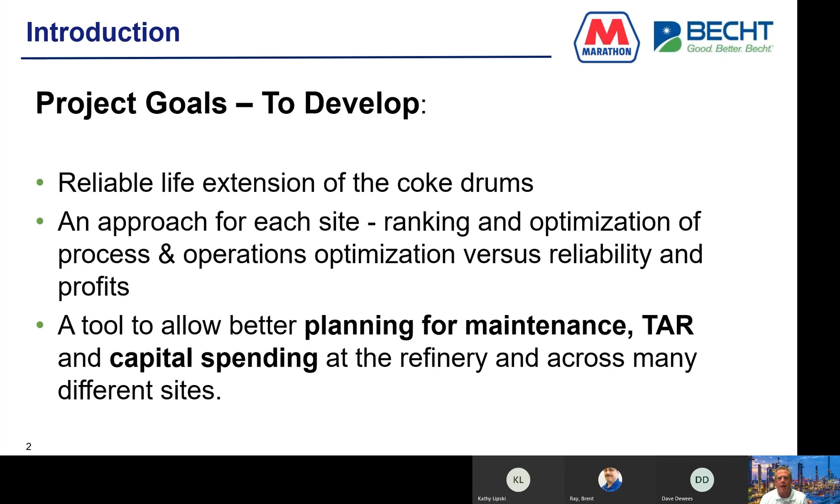And that's really the foundation for what we're going to talk about today, is how do you get out in front of this and come up with a thoughtful process to assess and improve reliability, and then finally to come up with a plan for better maintenance and turnaround planning. And that's really what led to this project starting in the first place.

It really was based on a conversation with Mike Nichols and some of his team with Becht's team at the API Inspection Summit in Galveston in 2019. How can you do this? How can you get out in front of it? Marathon went from having 4 sites with cokers to having 7 sites with cokers. So how do you manage all of that information and all of that data, and how do you help people learn from each other?

So that's really what gave the impetus for this project that we're going to talk about today. How do you bring together inspection, maintenance, operations, process, and really get people working together? And then from that is to develop, Mike wanted a report that people could look at, that they could plan for where their coker is, where their drums are, in their cycle time, where they are in their life, where they are in their inspection needs, their repair needs, and then most importantly, and really from a capital standpoint, is planning for replacement, because a replacement of cokers, drums, as you know, can be very expensive, anywhere from 50, 60 million to a grassroots coker, 200 million.

So you don't want 7 refineries coming to you at one point asking for money. So how do you do that? How do you come up with a strategy to work together as a team on site? That's really the critical thing. That's the takeaway I want you to get from today, is how do people work better together to manage the asset, in this case, the coke drums.

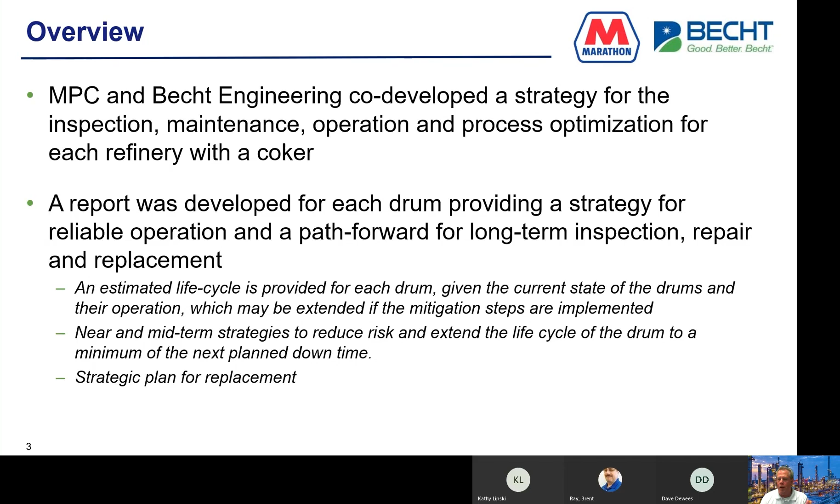We all know, we work on cokers, we've seen hundreds of cracks, we've seen through-wall cracks, we've seen bulges, we've seen squats in the skirts, we've seen leaning coke drums, we've seen drums where the skirt-to-shell attachment weld has actually come unzipped and drums actually sliding inside of the skirt. Those are things that you don't want to have happen. But really with cokers, as we all know, you got to get out in front of that, because if you don't, this is what happens.

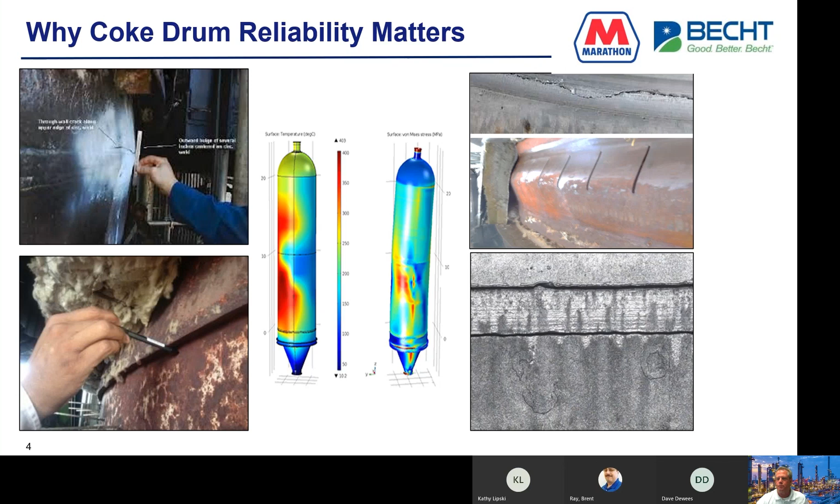At least that's been my experience, that not everybody works together. So that's one of the things we wanted to fix right off the bat. So we developed gap analysis for both inspection and process, and then mechanical.

So it's the process and operations folks. We have two SMEs here at Becht. Mike Kimbrell, shout out to Mike, former retired VP, he's a Becht advisor. And Mitch Maloney, formerly with ExxonMobil, both Coker SMEs, world renowned. And they help lead our gap analysis with the sites to look at how they're doing things, get them talking about maybe creating some best practices.

So we did that work, and then combined that work with the inspection and mechanical folks, same gap analysis, different questions, and then we got both of those groups talking to each other. That's really critical. That's one of the things that I think makes this program very powerful.

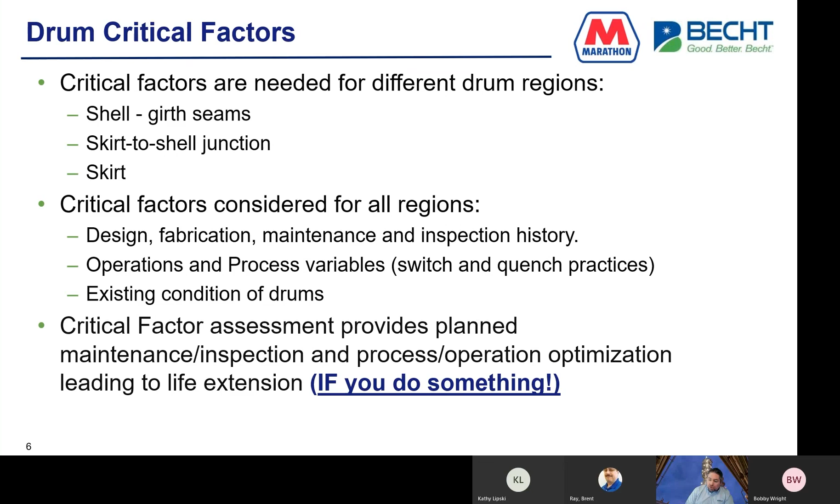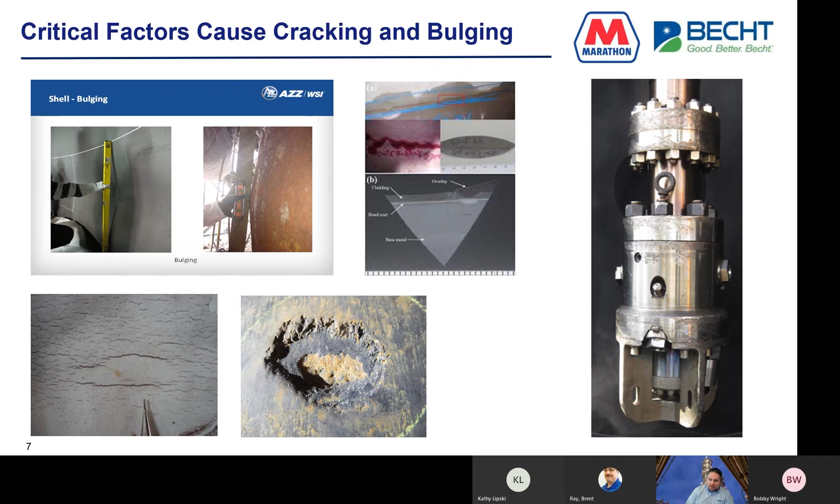Some pictures I'm sure we're all familiar with, all kinds of drum damage we're thinking about, from elephant skin cracking there in the bottom left, to some pretty severe bulging courtesy of AZZ — thank you — to the girth seam heat affected zone cracking we're used to finding as well, and even more exotic things. What you're seeing at the bottom towards the middle of the slide is actually some pretty severe drill stem damage from the coke cutting process. So just some illustrations that this is a violent, chaotic process with lots of opportunities for damage.

So possibly the most important thing is understanding the present condition of the drum so that we can project forward. So that's really our baseline. And it's really the foundation of not only this assessment, but future fitness for service assessments too. It's a comprehensive baseline that allows us to do all of that.

And just going into a little more detail for those critical factor designations we talked about a few slides ago. Design, the kinds of things we're looking for are fatigue resistant design, or how you measure up relative to fatigue resistant design, whether you have a constant thickness wall, matching welds, strength matching, drum metallurgy, certainly center feed is an important consideration. So all of those we look at.

Fabrication is maybe not as highlighted as it should be, but it's incredibly important, and we did unfortunately see the effects of some substandard fabrication as part of this project. But accurate attention to detail. Is there a blend radius where there's supposed to be a blend radius? Is the crotch radius the proper crotch radius, and does it blend smoothly into the surrounding material? Are the welds ground flush? Was post-weld heat treat performed and performed appropriately?

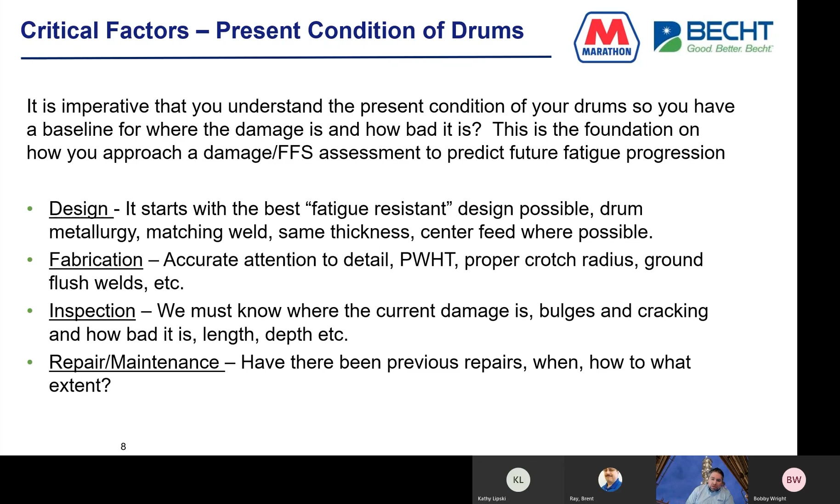And then inspection and repair maintenance are also really important. We want to know where the current damage is, and we want to be able to characterize it. We want to know how severe that bulge is, and if that bulge is near a girth seam, so that it's going to interact with it. We want to know what kind of cracks there's been, if they've been superficial, if they've been allowed to grow. And we want to know where those previous repairs are, and how extensive they were, and how they were performed, because that can also have an impact on future reliability.

So process and operations is an absolutely critical input. We have an extensive survey that our Becht process SMEs worked with Marathon process SMEs to develop, and all those folks that I gave a shout out to diligently filled out many pages of data when they had many other pressing things to do. So we thank them for that.

But it's not just about collecting data and writing it down and feeding it into the tool I'm going to tell you a little bit more about. It's also an opportunity to learn and optimize and improve daily process and operations. So this was a really important part of shared learning across the sites, and seeing how other people do things in a setting where you're also relating it to reliability and damage, which I think was really powerful.

So process SMEs from both our companies talked about steam and water flow rates, how you can get better conversion of feed if there was that opportunity, how you can minimize hotspots through operation, and improving operational consistency. So when we're talking about fatigue, consistency is an important consideration.

And we can make additional gains by measuring actual drum thermal gradients and strain and stress. So you can work with higher level parameters, which we certainly do, but the more data you provide through something like a health monitoring system or HMS, the more accurately you're going to be able to characterize what's happening to the drum metal and how that links to damage.

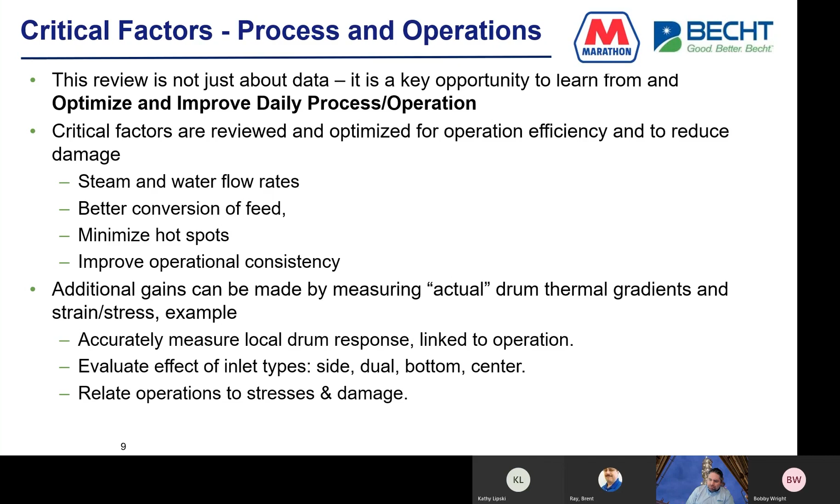So the other thing we do, and that we did as part of this project, was develop software to read in HMS data histories, automatically identify the cycles, and then create statistics on the critical factors. So we can go a little bit further than just saying, well, our target quench is 400 degrees or 500 degrees. We can actually come up with what the distribution is, because in coke drum fatigue, it often is the outliers that cause a major portion of the damage. So this is just a way we can leverage that actual data into the assessment.

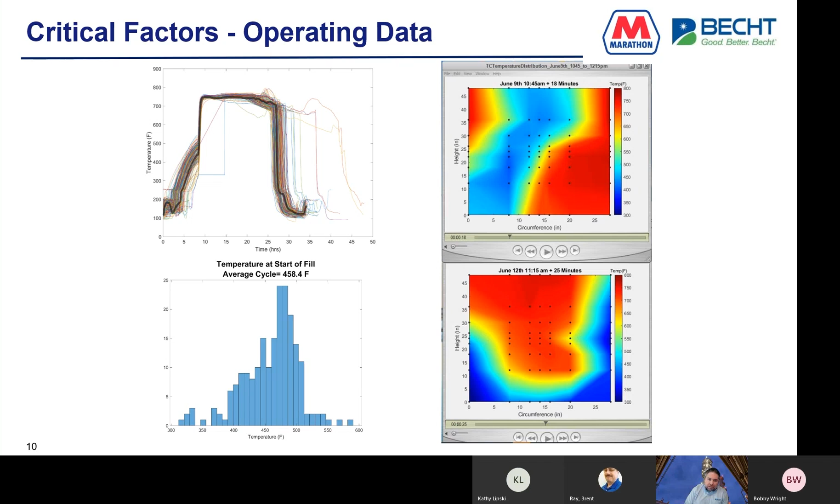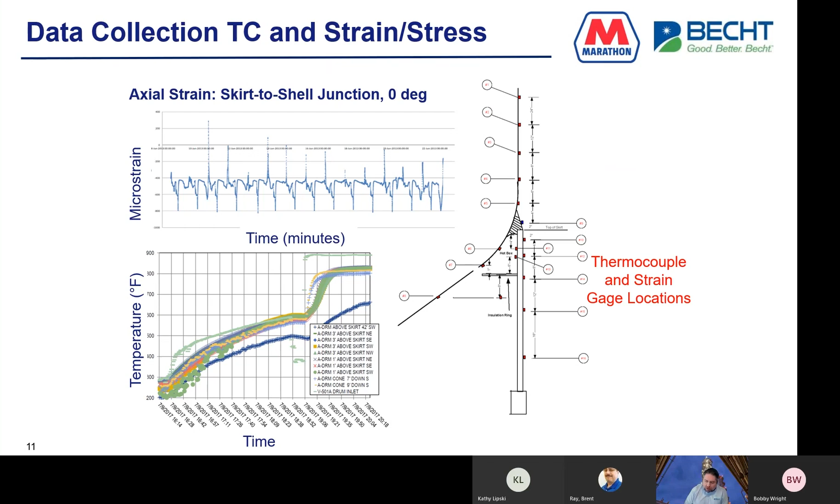And just to take that a little bit further, we can also not just work with temperature data, but we can actually look at stress and strain if we have those strain gauges applied to the coke drum. And just an example of variability here as well. On the negative side or the low side of that cycle, we actually are pretty consistent, but on the high side, you can see those peaks in strain do vary quite a bit from cycle to cycle, possibly because there are operational differences, which an HMS can help you look at, or just because the bad spots, the channeling has moved around the drum from cycle to cycle.

So perhaps the most important factor in terms of bulging and damage accumulation is probably quench, and not just quench, but the initial quench rate, which I think this slide shows really well. This is from RefComm in 2015 in Galveston from PDVSA. And this is showing you, based on HMS optimization, which underlies this, how their quench profile changed as they went through that process.

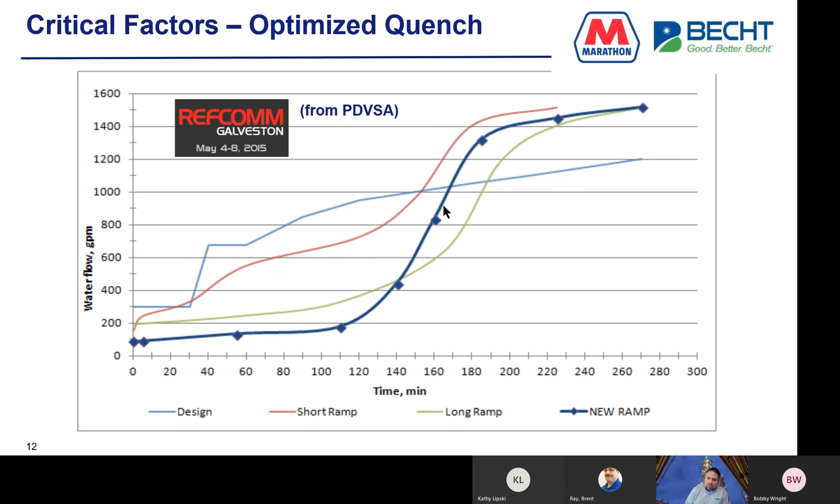So you can see they started with design, and at an hour, they were at 700 GPM. And by the time they got done optimizing, changing that flow rate until they got the strains to reduce in a meaningful way, they dropped that by 600, even more, GPM at that 1 hour mark. So, a factor of 6 difference to get the strains where they wanted. And it shows you that that initial water rate is just incredibly important, after which you can dump as much water as you want in, pretty much. But a good illustration of how you use that data to really improve operations, which is a goal when you do this.

This is sort of a graphical overview of the process we've been talking about. We start with the history, with the data, the surveys, feed that into the gap analysis. Site visit was an important part of all of these, to really talk through that data, talk through gaps in the data itself, and to make sure everyone understands it. But then the next step is to feed it into the actual life cycle analysis, which is what we're going to talk about next, and which is really, as I mentioned earlier, the basis for that level playing field across drums, across different conditions. And in the end, all of that feeds into the action plan and recommendations.

Sticking with the life cycle analysis, though, we found 3 keys to success for making this work. One, using industry data. And I just want to step back for a minute. Bobby mentioned Mike Nichols, now retired from Marathon. But this really all started with Mike saying there's got to be a way that I can have some indication of approximately where I am in the life cycle without putting 96 thermocouples and strain gauges on every single drum and doing years of analysis with finite element and data analysis and more complex simulation. I have to be able to have some indication. And so that's really what this was about, taking a relatively simple fatigue model we're going to talk briefly about and calibrating it to industry data.

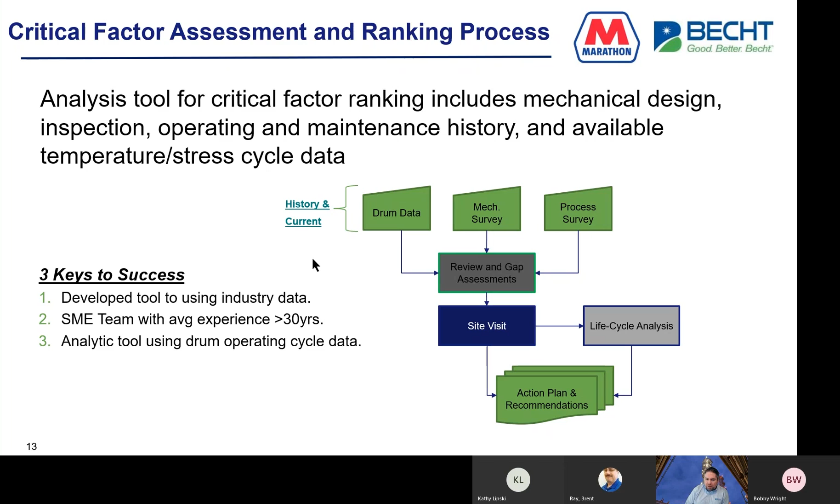Now, the key to making that work, without a doubt, was the SME team. So identifying the right critical factors and their relative criticality, how they affect damage accumulation, so that we could actually successfully calibrate to all this industry data. And not exaggerating, there are well over 100 coke drums and dozens of coker units that are available as part of that to do that calibration. And in the end, what we ended up with was an analytical tool that also pulled that operating cycle data that I showed you a few slides ago and gave that a little bit additional layer of complexity and refinement to feed into that life cycle analysis.

Okay, so with this tool, we're combining the critical factors to estimate fatigue damage and progression. That's really the heart of what this is. And as I mentioned, it's based on calibrations to numerous case histories. And the calibration is really based on a model that I'm going to show you graphically on the next slide.

But it's based on two key events in a coke drum life cycle that really break up the life into three stages. The first one is when you first start getting initial cracking and bulging that you can notice, let's say, visibly. And then the second key event is your first through-wall crack.

Those are important because that data is available going back historically through many decades. It's been identified, perhaps without thinking about life cycle the way we're talking about, but as key events in the history of a coke drum by people going back to the 60s even, because they were recording that data. So that's given us a rich amount of data to work with and to try and calibrate to, which again, I'll show you a little bit more on the next slide.

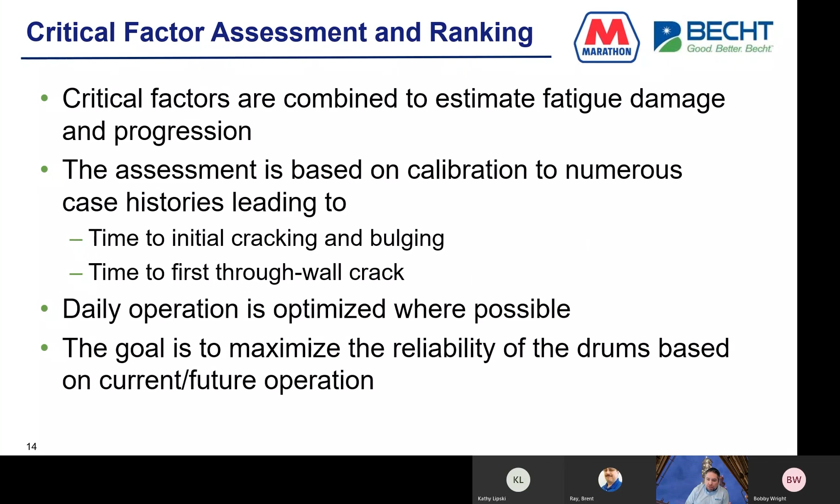But I don't want to forget to mention that we also want to optimize operation where possible with the goal of maximizing the reliability of the drums, because that's what this is truly about, is maximizing the reliability and the predictability, which we're going to also talk a little bit more about.

So how the assessment tool works, this is the graphical representation of what I mentioned. The first dashed line, between 35 and 50% of the cycles to retirement, is bulging and cracking possible. And in our model, that is the breakpoint between stage 1, which is minor problems and very little cracking, and stage 2, which is predictable damage. Cracking and bulging has started, but we're monitoring them, we're repairing them. They're things we can deal with during planned outages. They are not unpredictable and causing unplanned outages, so to speak.

That starts to change as we get further into life, about 75% of life, but as little as 60-65% in some cases, depending on how diligent you've been at finding cracks and repairing them. That certainly has a big impact on where that shift occurs. But it's really when you have that first through-wall crack, that's not the beginning of the end, so to speak, but certainly the beginning of things becoming more maintenance intensive and more frequent shutdowns. And without more frequent shutdowns, certainly a higher risk of unplanned outages.

I want to talk about the axes for just a minute. So on the y-axis, we don't have any numbers. We just say cumulative cracks up to many cracks. And to be a little quantitative about that, when we say many cracks at the retirement end of life, we're talking about hundreds of cracks, typically surface cracks with, depending on how you operate, anywhere from just a handful, maybe 3 through-wall cracks, to more than 10 can be possible based on how far you push out that retirement.

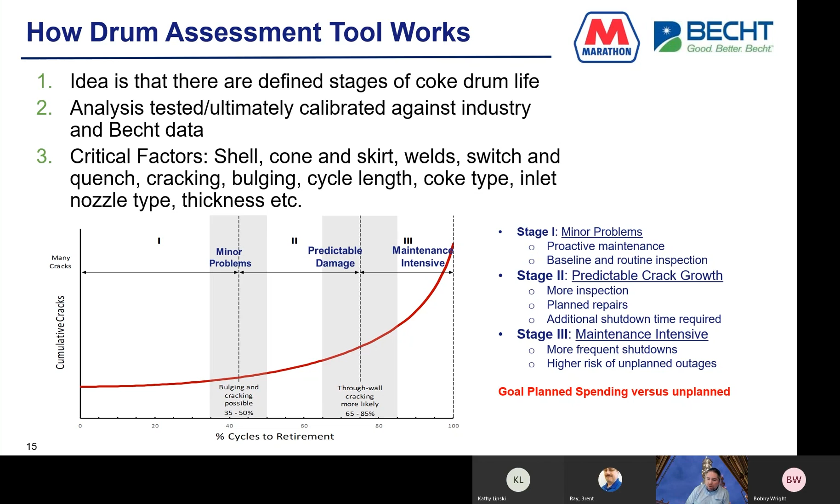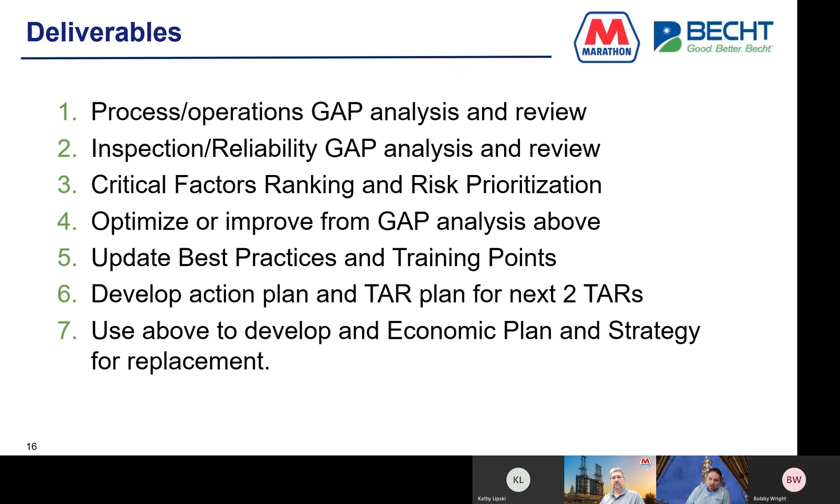Right now, I'd like to send it over to my colleague, Brent Ray with Marathon. He's going to talk specifically about how we applied this to the Marathon fleet.

And I just want to say thanks to Brent. We've worked quite a bit on this together, and it's been a wonderful experience. So thanks for the opportunity.

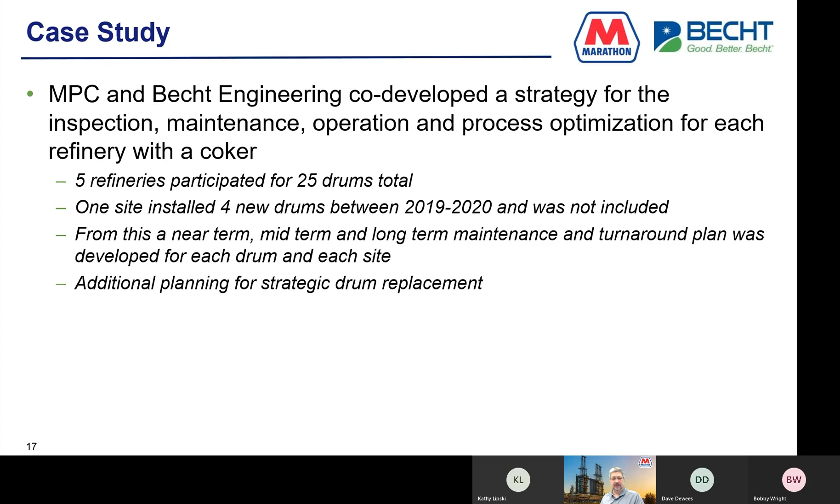So the whole process comes down to, how do you present this information? How do you take the information that you have gone and talked about, you've debated about, and you've negotiated plans with? How do you present this to management to say, we now have a good plan?

Because one of the things we did not have is a good handle on what a life cycle for a coke drum is. We know that it does get more maintenance intensive the older it gets. We do know that we can repair it and we can keep running and keep repairing. But we also know that there are things with operation that we have to change due to an economic climate or due to other things that are going on in the process that could affect us. How does this all roll together?

And so in presenting this to our refinery leadership teams, what you're going to see here is some of the things we worked through on what we call coke drum set C. We had 8 coke drum sets out of the 25, actually out of the 29 if you count the 4 new ones, because we did rank them even though they are brand new.

And out of those sets, we developed a plan for each coke drum and for each coke drum set to get us safely and reliably to the next turnaround. And then what do we do beyond that?

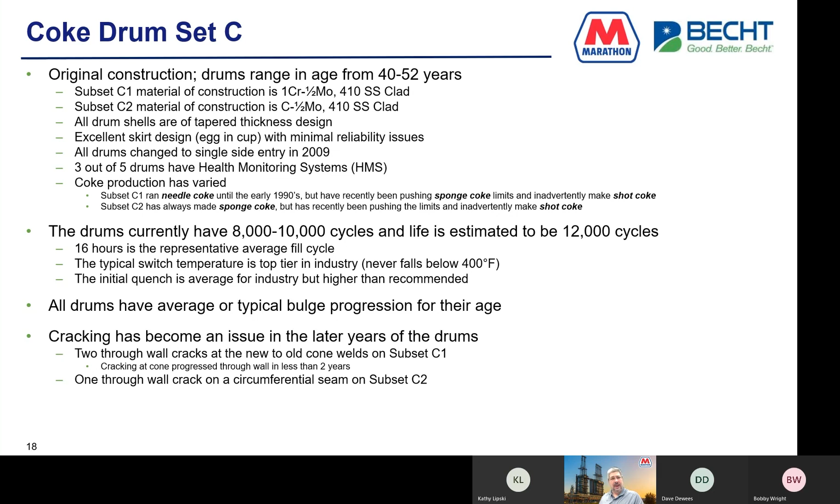All of this adds up into creating a plan, and for every drum set, being able to rank them based upon that chart with life cycles that Dave presented. So let's take a look at those charts.

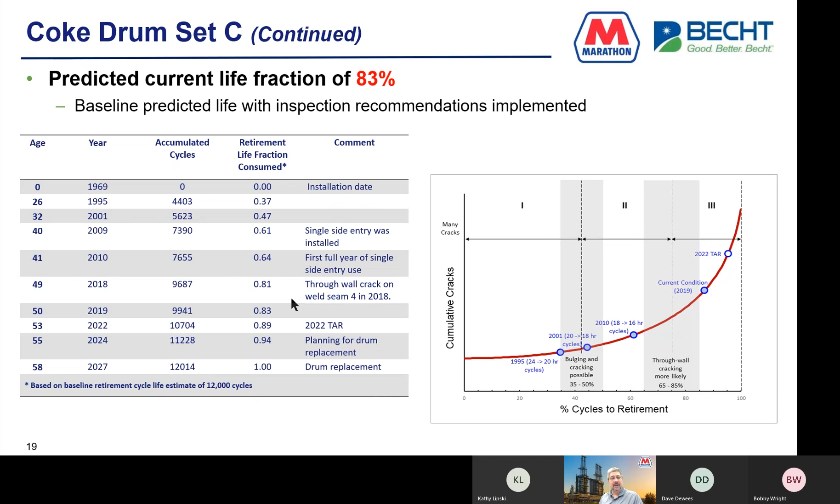This chart allows us to take a look and say, in 2027, we probably should be replacing these drums. Now we can start planning 7 years out, not 18 months, not 24 months - 7 years out. We can look and say, what worked well? What is new in industry? What can we do to get a good, reliable, safe coke drum here in 2027? And in the meantime, what can we do to maintain safety and reliability of the coke drum we have so we can get a full life cycle out of it?

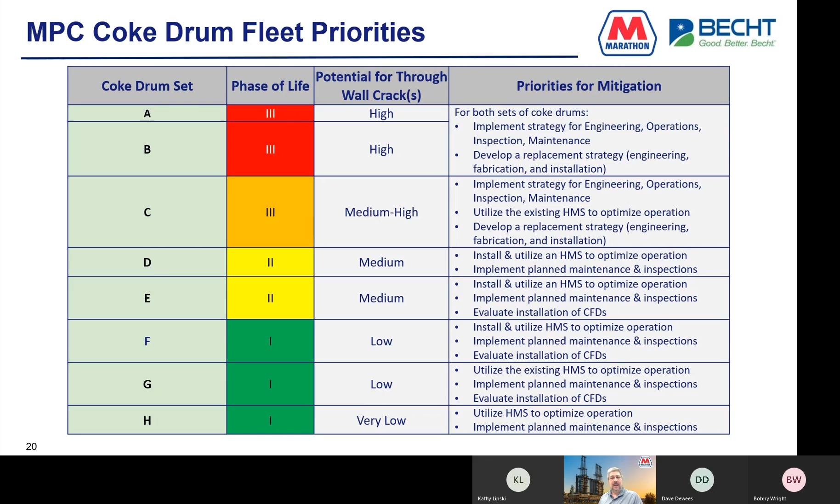We want to work with those groups to collaborate on making sure things happen. We want to utilize and expand the HMS health monitoring system to optimize operations going forward and increase reliability and safety on those drums. Lastly, we are doing work to look at a replacement strategy: what do we want to do and when, so we can get something new in there while keeping the old one going until that time. Again, safety and reliability are the two key issues here.

In summary, thank you Bobby, thank you Dave, thank you Becht, for all the work you did to help us get to this point with our life cycle analysis. Thank you internally to Marathon personnel for giving your input, taking it, applying it, and putting it out there for all of us to use in a collaborative manner.

We really believe this approach provided a good structured reliability assessment. It has aided us in optimization of operations and will continue to aid us in the future. It's given us prioritization of work so we know when to replace and when to do the work - near term, midterm, long term, and even the shutdown in between - all now planned with activities that will help increase safety and reliability. That proactive planning is a strategic item we need to keep in our toolbox.

Taking that away, this life cycle analysis and life cycle management has now become a coke drum reliability toolbox approach. What are we going to do? We are going to maintain it. When we get on the turnaround, we're going to reassess ourselves to make sure we have that plan going forward to the next turnaround and beyond.

In overview, this collaborative approach has given us a transparent way to communicate between all these groups so we all understand where we are. In the end, we know we've extended the useful life of our drums, and we know where the end is. It's given us a proactive plan and a chance to look at turnaround, capital spending, and maintenance spending on all these drums - and on each single drum - so we can be very good at knowing what we need to be doing.